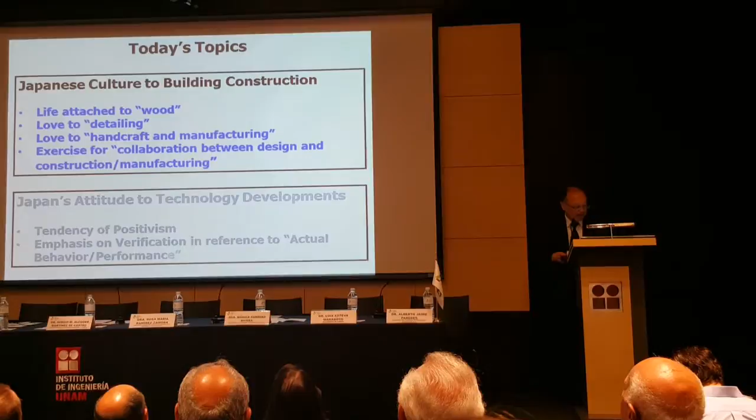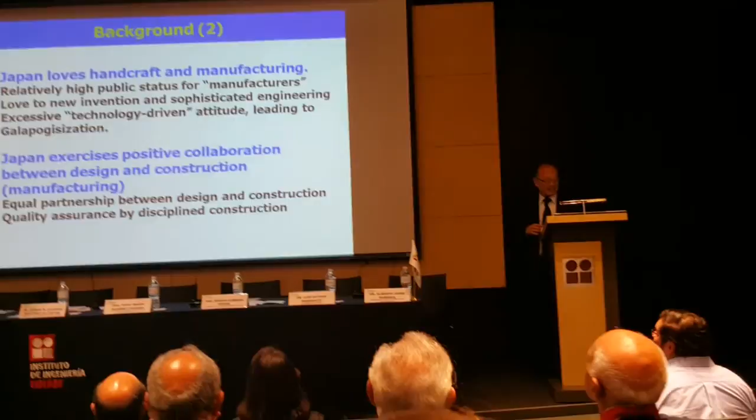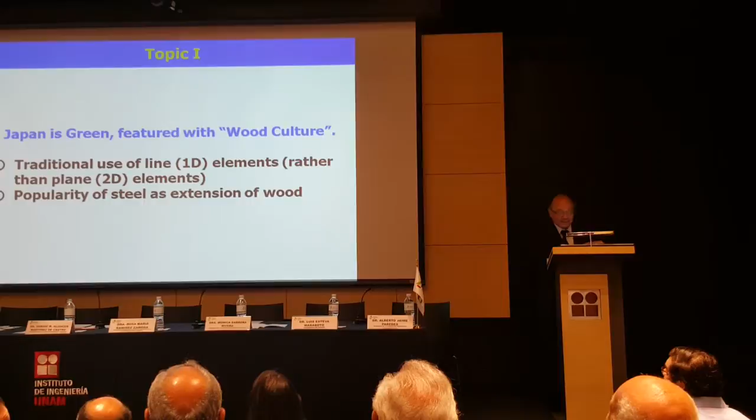Now, two topics I have brought today. One is Japanese culture as it relates to building construction. The other is Japanese attitude toward technology development. I'll start with the first topic. Japan is green, featured with wood culture, different from yours. Japan loves detail, which really characterizes Japanese architecture. Third, Japan loves handicraft and manufacturing. Fourth, Japan exercises positive collaboration between design, construction, and manufacturing. Those are the four subtopics, and for the rest of the time I'll supplement each one.

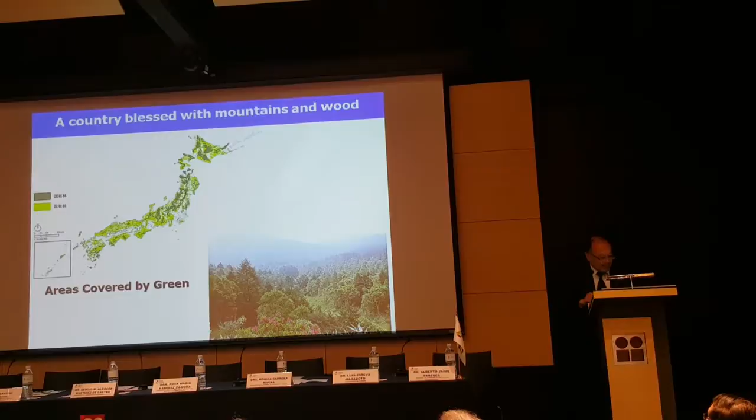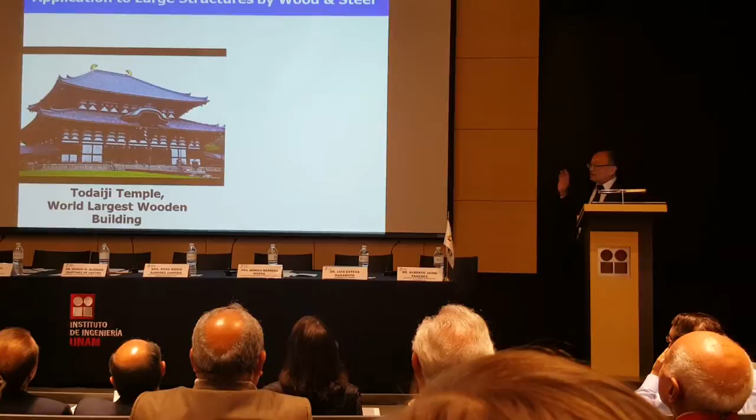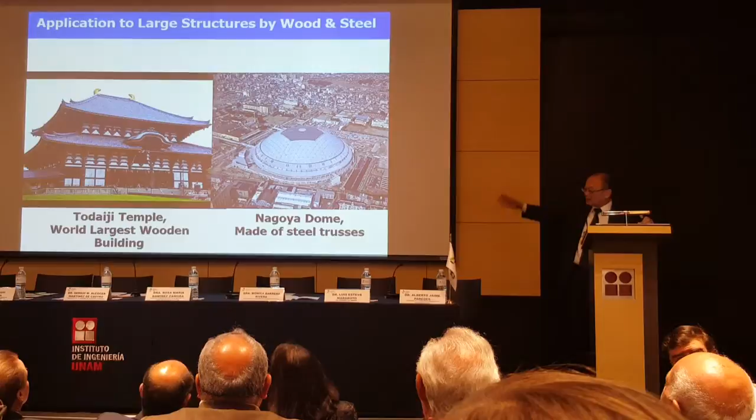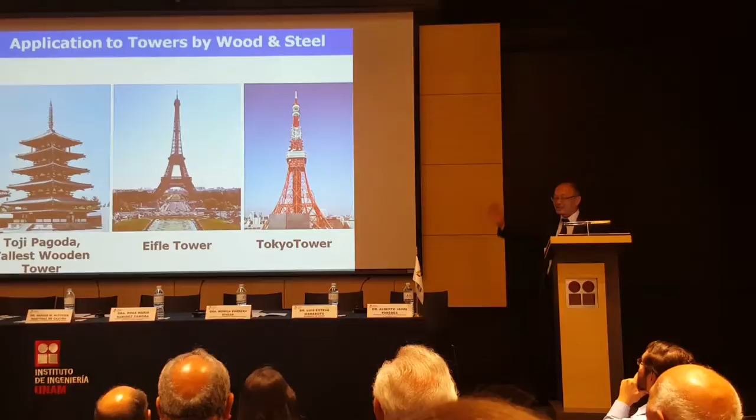The 5-story pagoda is the tallest wood tower, the world's tallest wood tower. And then the Eiffel Tower in the middle, Tokyo Tower on the right—again, from a distance, nearly the same. So Japan is destined to use and love steel by culture.

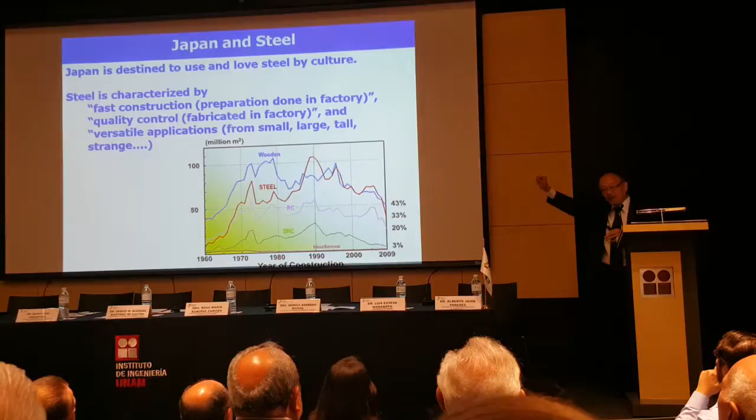To my understanding, there are two basic materials for building construction: one is wood, the other is stone. My understanding is that Mexico has a stone culture. Stone culture moved to reinforced concrete, while wood culture moved to steel. Two different worlds—I come from the other side of the world.

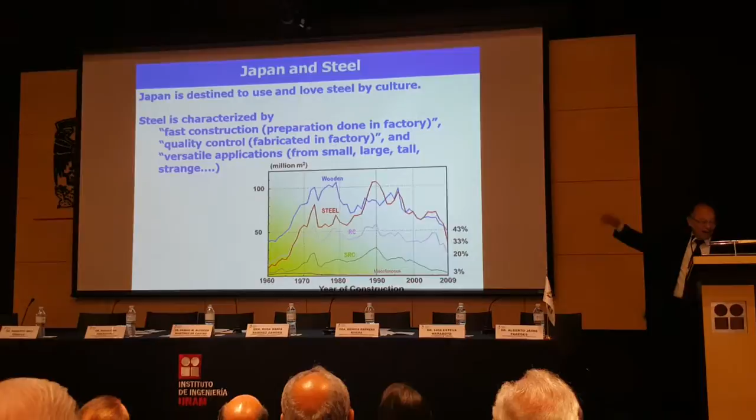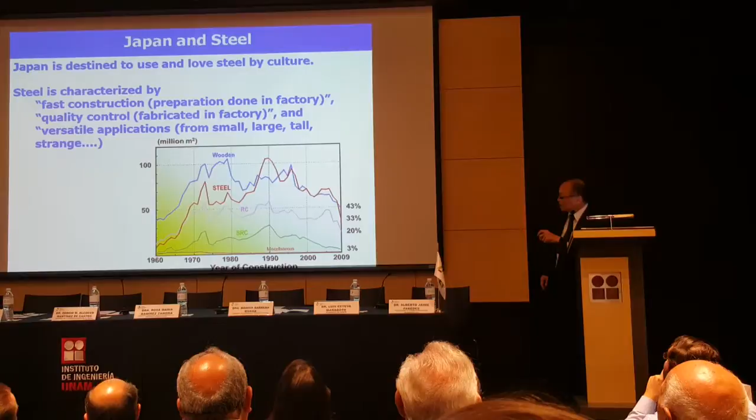Steel is characterized by fast construction, easy quality control, and versatile applications for small, large, and tall buildings. This picture shows the year of construction versus the percentage of each type of material used for building construction: steel, wood, reinforced concrete, and composite. So steel and wood side by side—we are a wood culture. Now, the second topic.

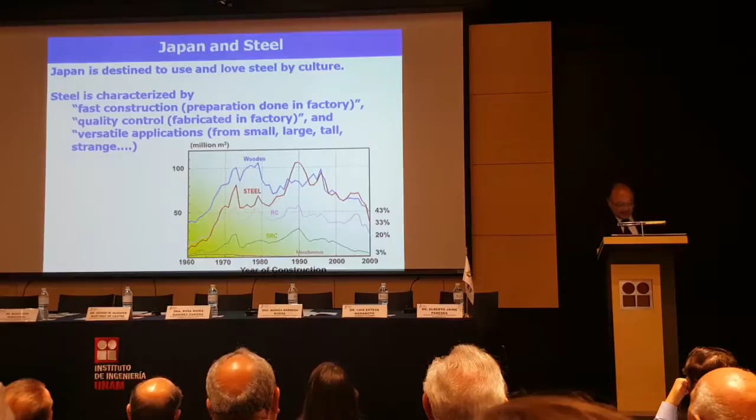Japan loves detailing, which characterizes Japanese architecture. What is that? Complicated roof details, exquisitely crafted eaves, complex connections using interlocking joints, and things like this. We inherited many of these masterpieces built over the past 15 centuries. How it goes, no names, no explanation needed.

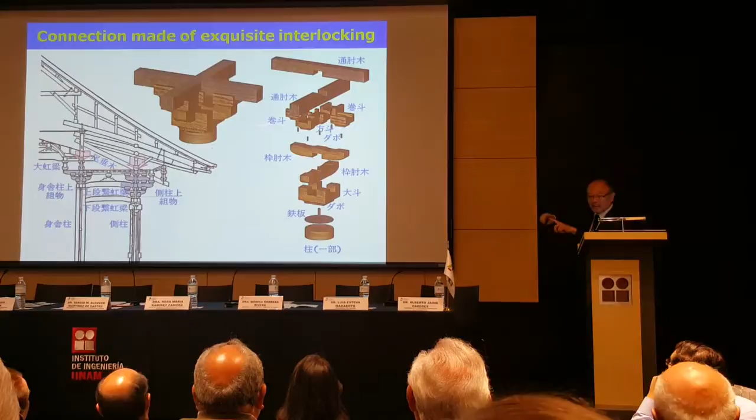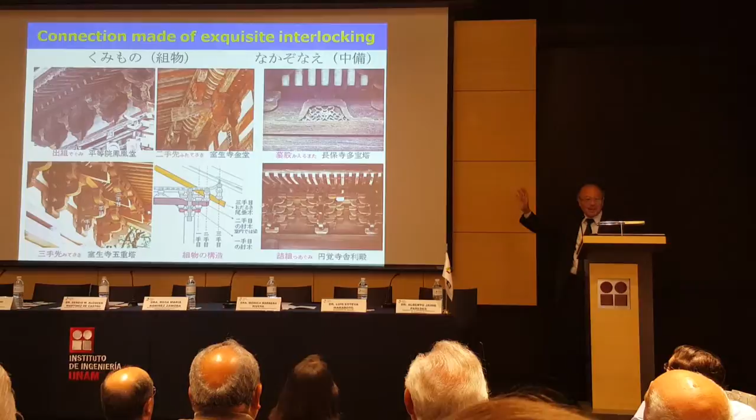Look at that—a connection made of exquisite interlocking joints. There are many pieces, with decorations. This really characterizes Japanese wood structures, and it also carries over into contemporary design and construction work.

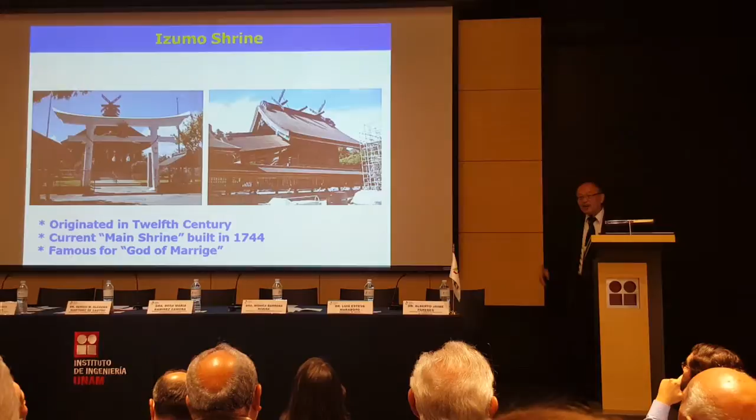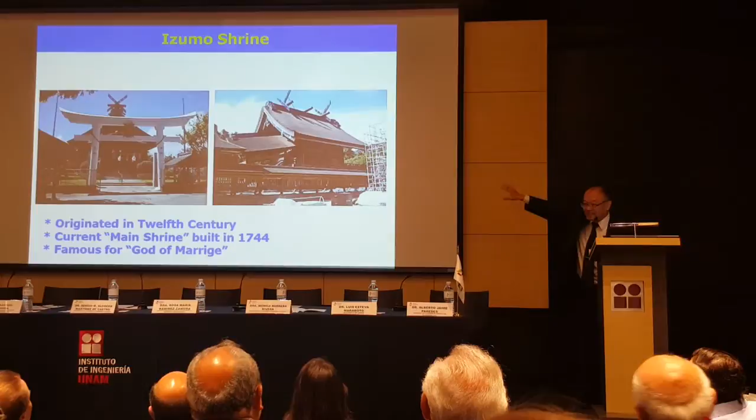This is the City Hall of Izumo City in Shimane Prefecture. There is the Izumo Shrine, originating in the 12th century, with the current main shrine built in 1744. This shrine is famous as the god of marriage—so young people, if you want a good partner, go there and you'll have a good chance. It's a famous shrine, please remember this. See the shape.

The original structure is now Izumo City Hall, somewhat similar. This facade is now like this, but this is a shear wall. And these are vertical lines like long timber columns, but this is CFT. So this way, again, we like to make the resemblance between the past and the present.

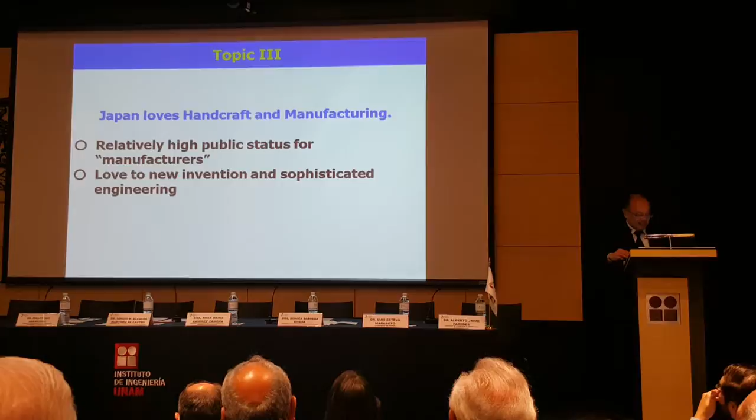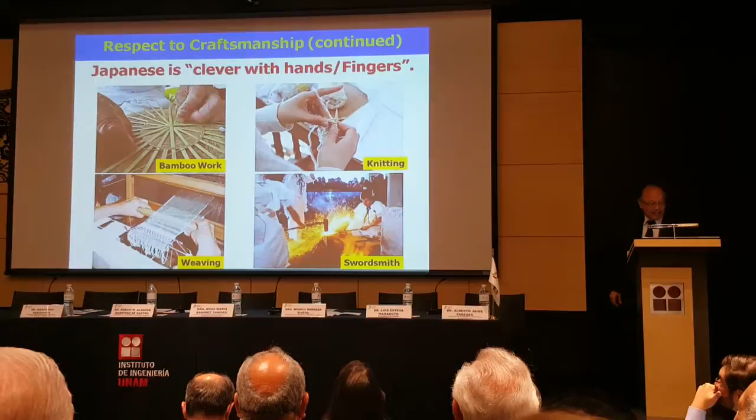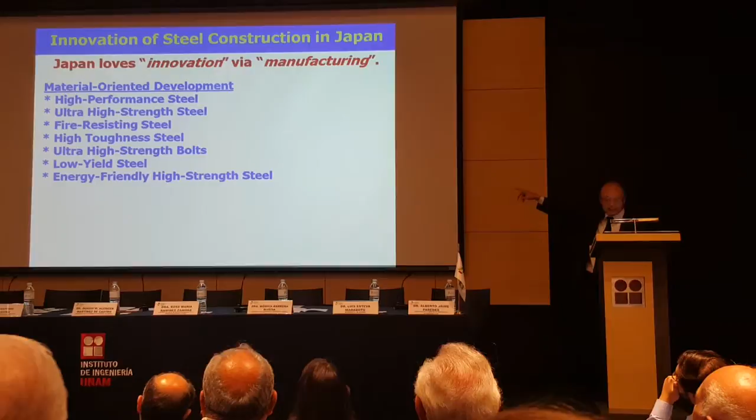Because of this, Japan loves innovation via manufacturing. This again is a characteristic that features Japan. Within the scope of steel, there are many developments done in Japan: high performance steel, ultra high strength steel, fire resistant steel, high toughness steel - many, right?

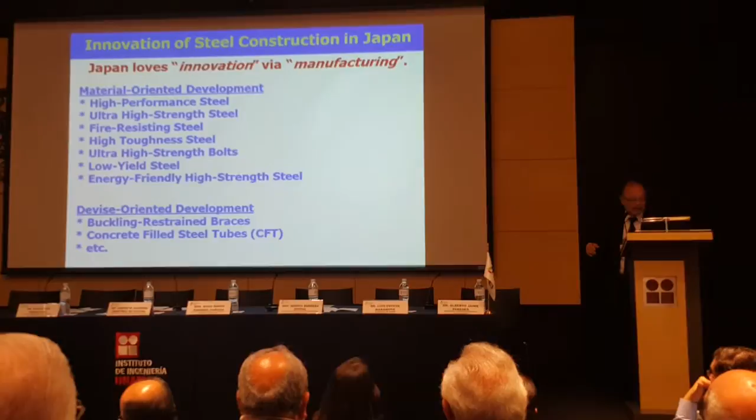Also, next to the material, we have elements and devices - buckling restrained braces, some of which you may have heard of, or concrete filled steel tubes, etc. They are not necessarily originated in Japan, but very much developed in Japan.

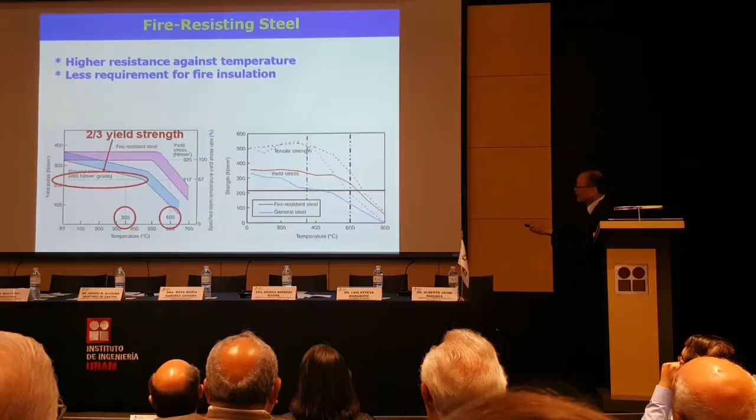High performance steel, fire resisting steel - this means there's something special such that the strength will not go down with high temperature, so no fireproofing is needed. Or, high strength is on one side, low strength is on the other. Low strength steel, intentionally low, is then used as an energy dissipator.

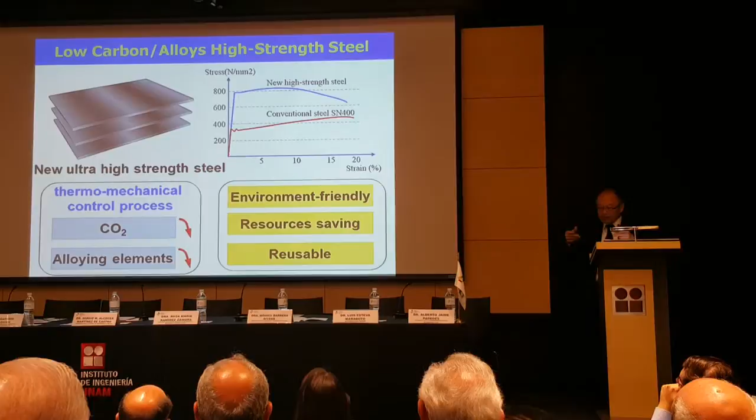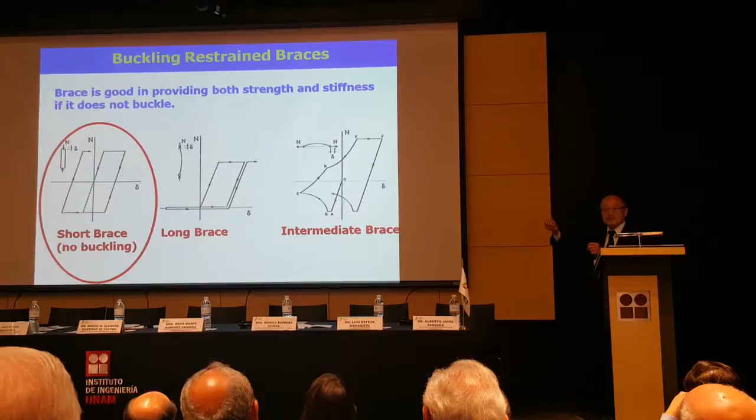These days, in the name of CO2 reduction and being environmentally friendly, we develop different types of steel as well. And then buckling restrained braces - braces are normally good in tension but bad in compression because of buckling. But then we wrap the brace like this to avoid any buckling. This has been quite popular lately in many countries.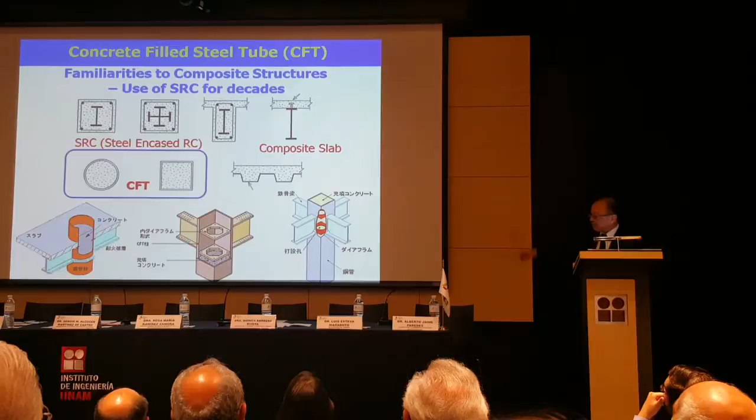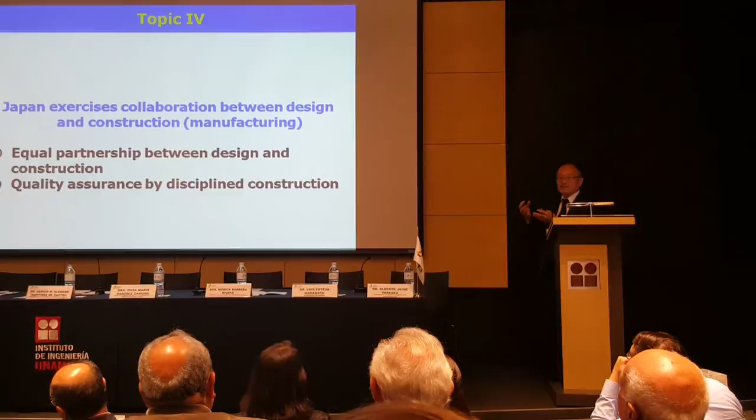Or CFT - it's simple. Here is a box, and we put concrete in it, that's it. Nothing else, no reinforcement. But still, this exhibits good ductile behavior. We like manufacturing, and manufacture-oriented research and development are some of the keys that characterize Japan.

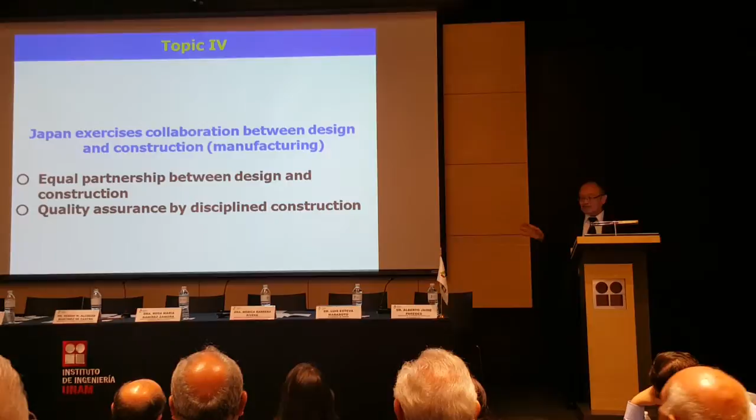Now, the last topic about my first subject: Japan exercises collaboration between design and construction. What is this? One is equal partnership between design and construction. The other is quality assurance through disciplined construction.

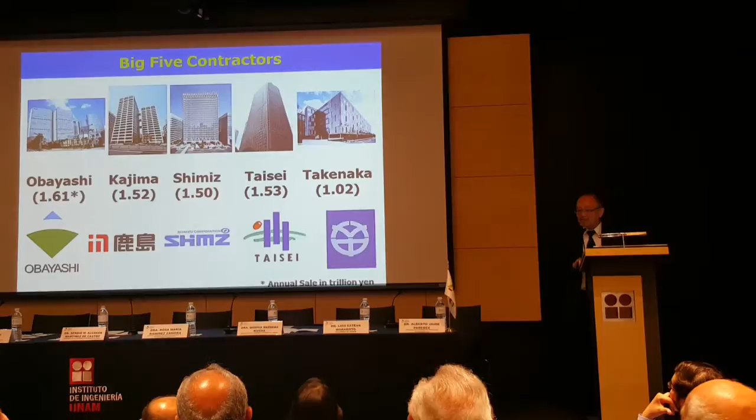In Japan, we have the so-called Big Five general contractors: Obayashi, Kajima, Shimizu, Taisei, Takenaka - those big firms. What characterizes them is they have active in-house research and development institutions. All five of them have in-house research institutions themselves.

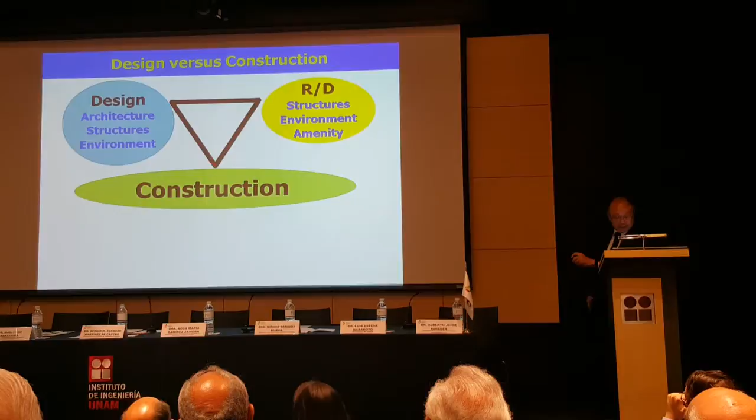What they do is this: they do design, and they do research and development. Not only that, they also do construction - that's the biggest portion. That's the Japanese way: positive interaction among those three sectors for the ultimate construction of buildings.

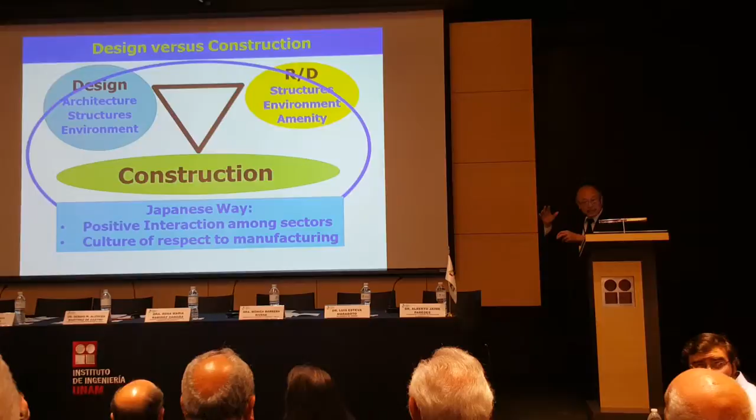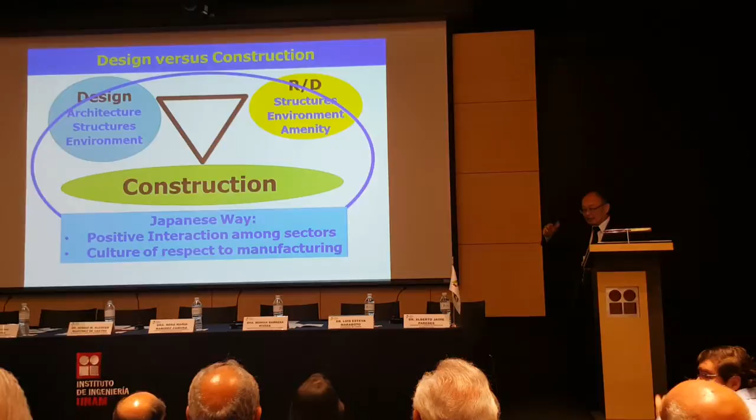Traditionally, of course everything is relative, but please look at the culture of respect for manufacturing. I showed earlier slides about craftsmanship, fabrication and manufacturing. So we have a spirit and culture of this, making those three components come together for ultimate quality control.

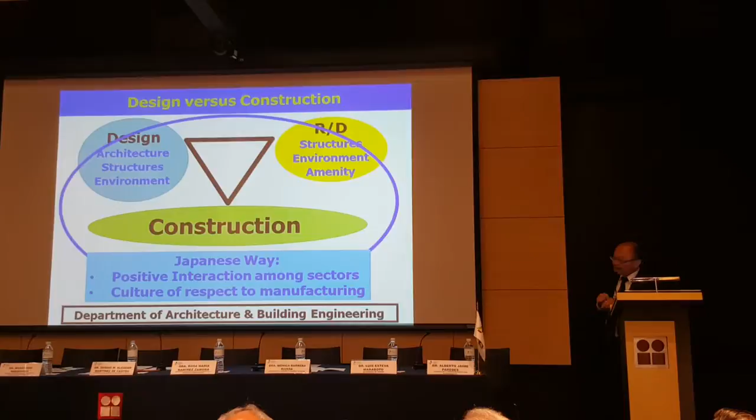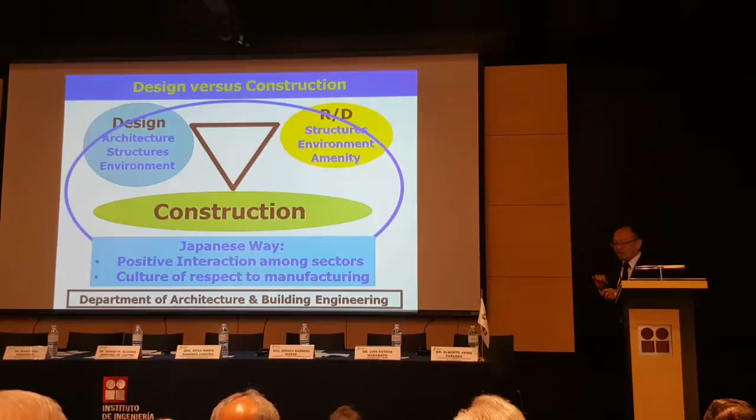This may partially be because of the special education system in Japan. I am a structural engineer myself, but I did not graduate from the Department of Civil Engineering - I graduated from the Department of Architecture. Only in Japan these days does the Department of Architecture and Building Engineering teach environmental aspects, structural aspects, design, architecture - everything.

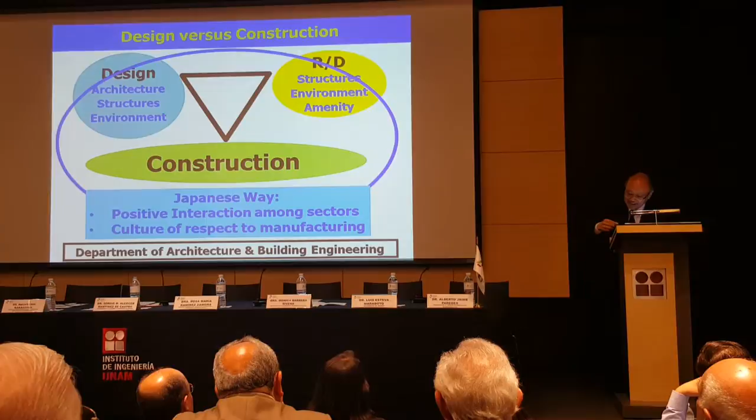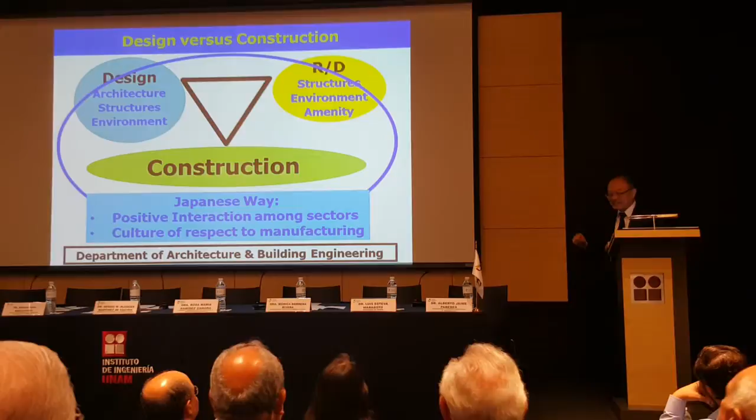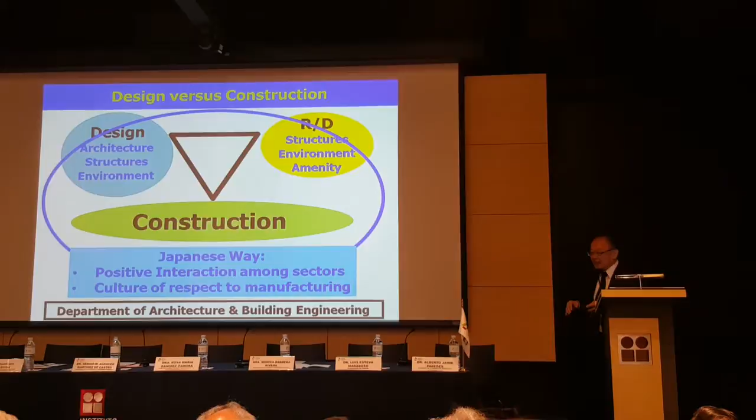At age 18, when I entered university in this department, I wanted to be an architect. But after 3 months, I was smart enough to understand I'm not talented. But I didn't have to leave the department - I could stay, and I took a lot of design-oriented courses myself, particularly for the first 3-4 years. Many of my friends now are architects, so something is probably embedded in me thanks to this department. This may be a reason why the Japanese way works.

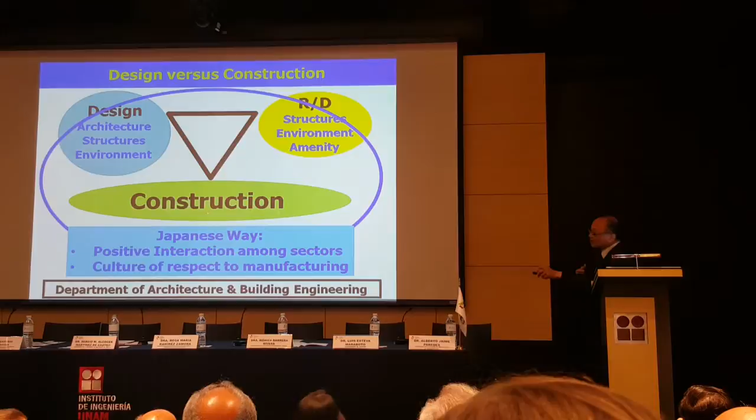Design is important, R&D is important, but naturally the most important is construction - how do you discipline construction? Example one: morning assembly, everyone comes, gymnastic exercise together, instruction sessions for anything new, or schedule checking all together.

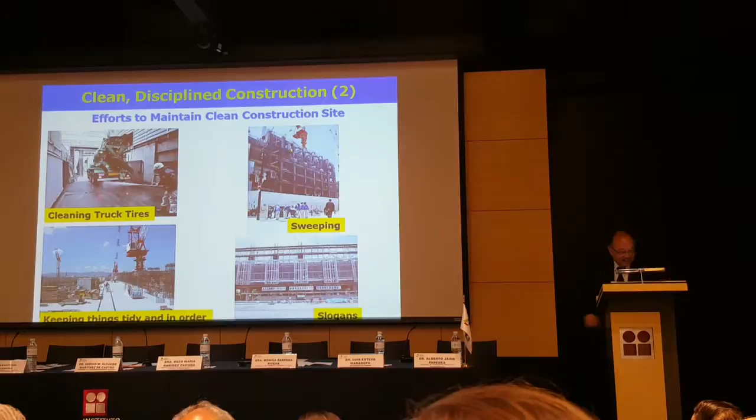When the truck comes in and comes out, they have to clean up all the tires, keeping things tidy and in order, sweeping constantly, and being safe.

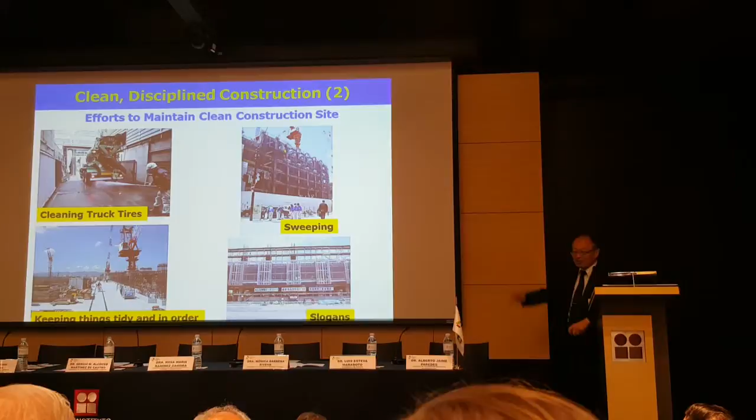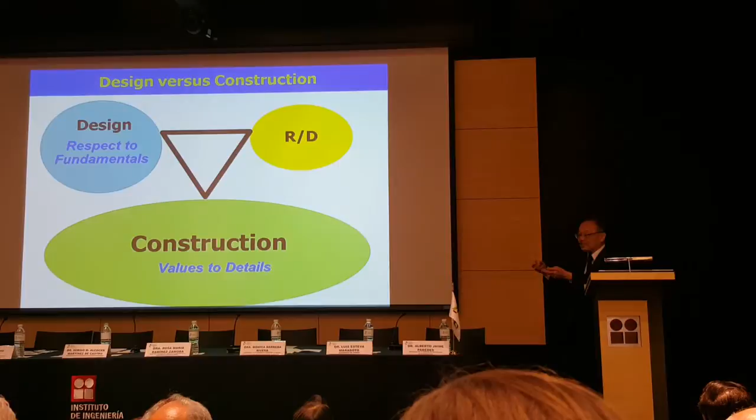So, design. Essentially, design is meant to have respect to, say, fundamentals. But on the other side, construction, they put value to details, because this is a key for the ultimate quality control. I think this is the end of my first subject.

So this, of course, it's a big propaganda, but nonetheless, I really wanted to show what spirit we want to maintain. Now, on December 8, 1987, I had an honor to introduce myself to Professor Rosenblueth. After nearly 30 years, I'm here. I'm overwhelmed. This is me.

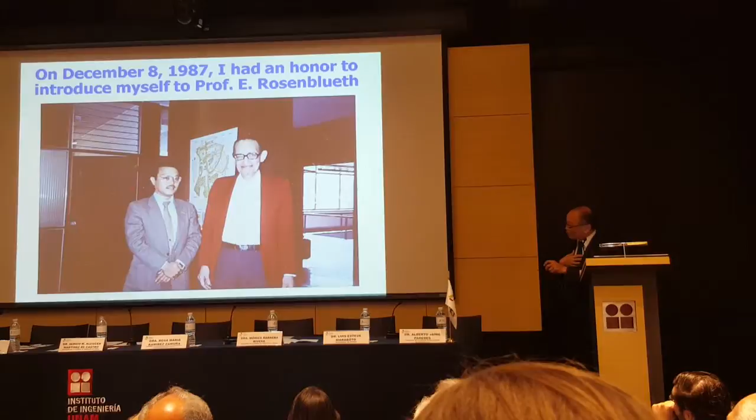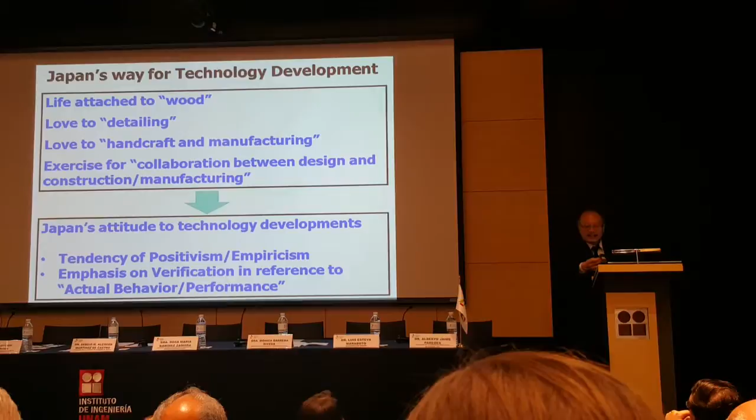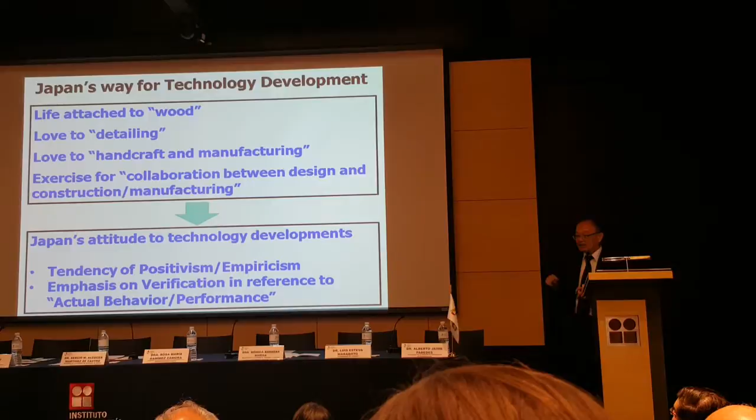Let's go to the second subject. A little more technical, but this means, say, less interesting. But nonetheless, Japan's attitude to technology development. What is this? We have a tendency of positivism or empiricism, whatever. So we tend to put emphasis on verification in reference to actual behavior or performance. So, the translation is, right? Fundamentals, the theories, and that's good, but we don't trust 100%. We really want to see the reality. And then for the first time, we understand, let's go.

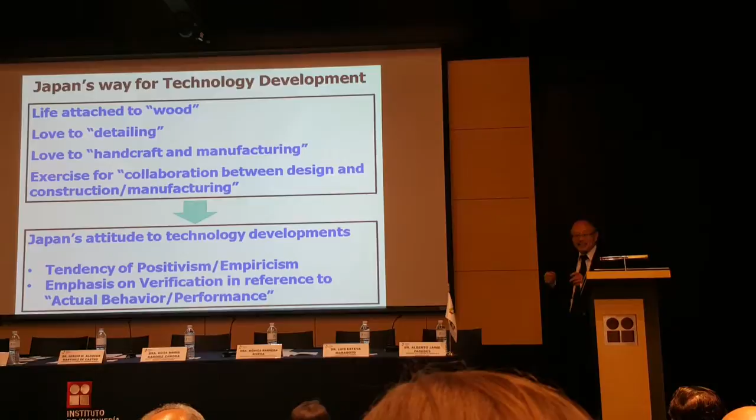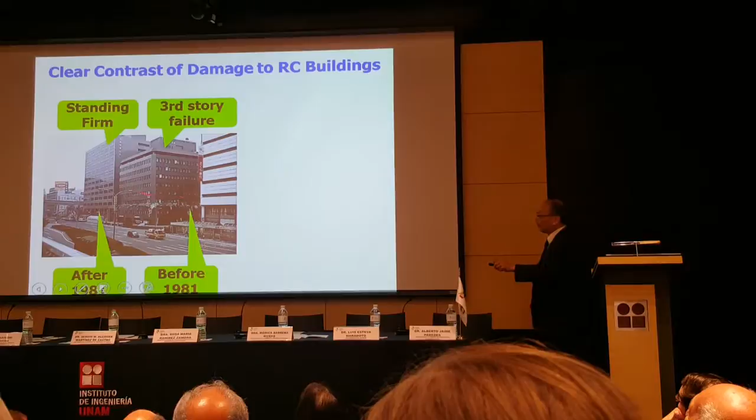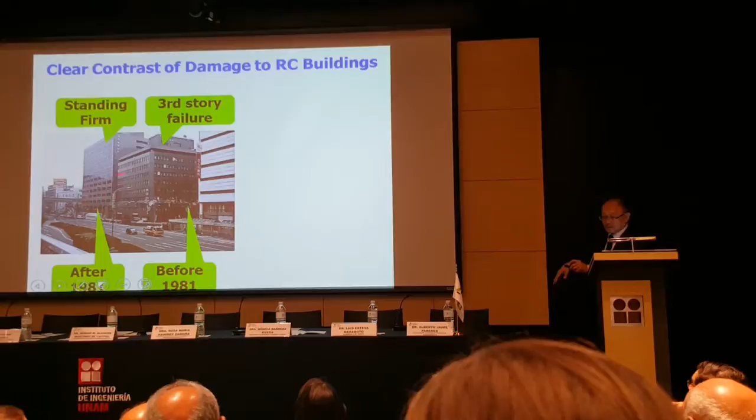Now, 1995, we had the Kobe earthquake. And then some of the pictures you may have seen, collapses after collapses. And then here we found a clear contrast in damage between the two buildings, for example. So those two, downtown. The same site, the shaking is the same. But one, the third story is gone, but the other stood firm. What is the difference between those two? Year of construction. One is pretty old, the other was new. And then new one really good, old one not good.

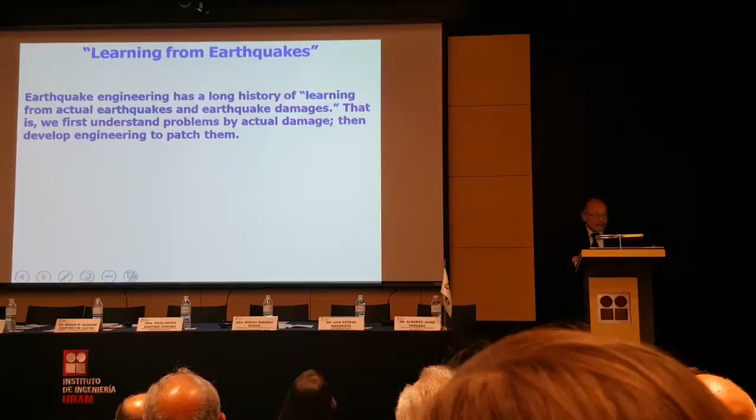So then what we have learned out of 20 years of Kobe. First, earthquake engineering has a long history of learning from actual earthquakes and earthquake damages. That is, we first understand the problems by seeing the damage. Then we develop engineering to patch them.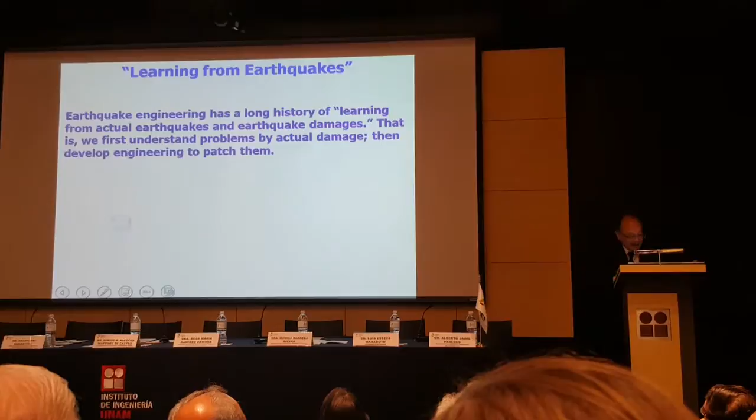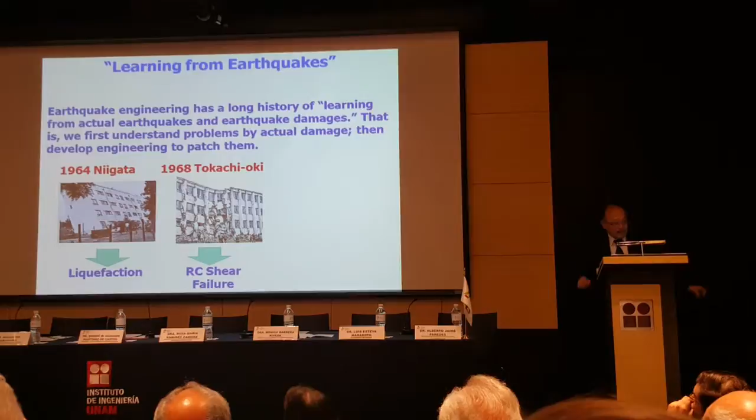Now, as far as Japan is concerned, 1964, we had the Niigata earthquake, and we suffered from serious liquefaction, so buildings completely toppled. And then anti-liquefaction research and also practice began after 1964. 1968, we had the Tokachi-oki earthquake, then shear failures after shear failures, columns like that. Then reinforced concrete shear failure, how to avoid it, became the important issue, eventually reflected into our seismic codes.

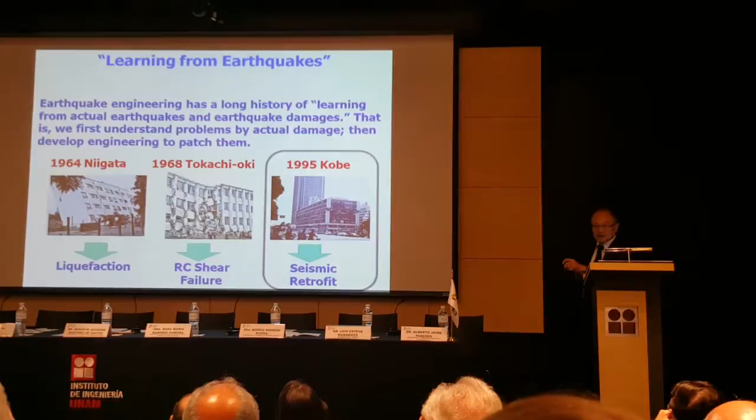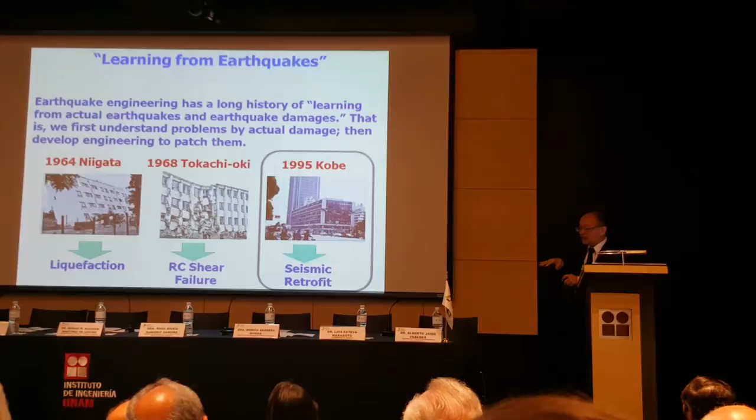Now, 1995. What was the biggest lesson? Seismic retrofit. They look the same, but some very strong, some very weak. A lot to do with the age, but also with the way of construction. Then those not sufficient in performance with respect to the current standard, they have to move up. This is called seismic retrofit. This, of course, has been said for many years, but in 1995, we really confirmed the importance of that.

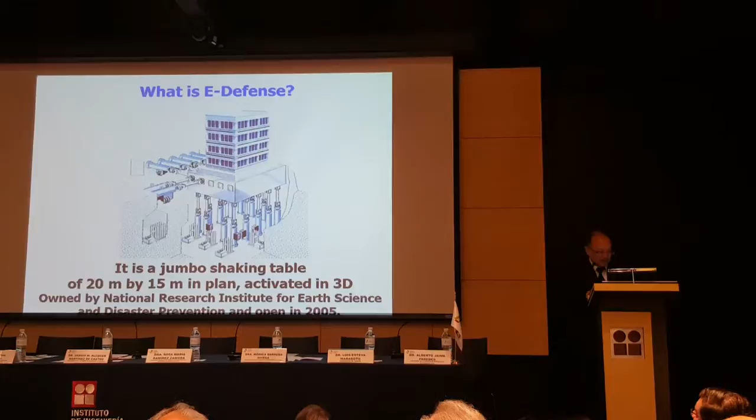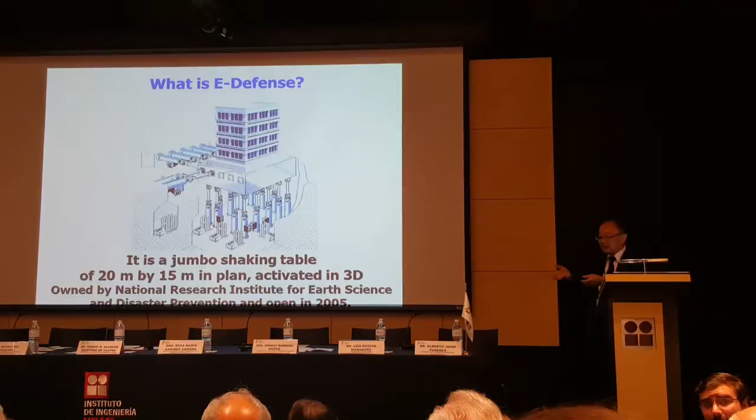Then, after 1995, the government of Japan put a lot of money into this special facility called E-Defense. What is this? It is a jumbo shaking table of 20 meter by 15 meter in plan, activated in 3D. This is basically a big table, put the real structure on it, shake it to see if it behaves. Why did we invest in such a huge facility?

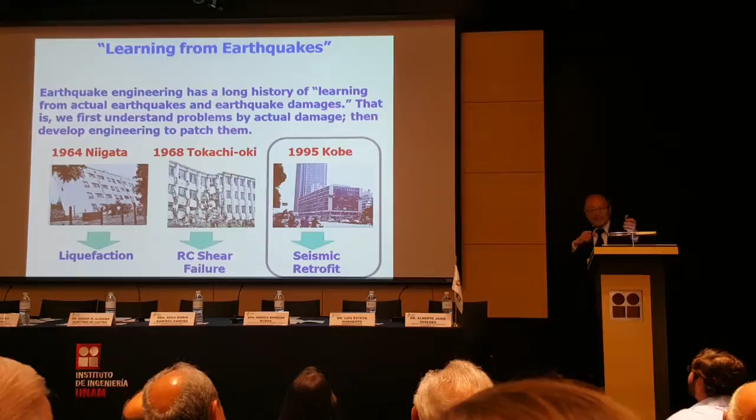Because of this big problem, how to solve it. We have many solutions, but please remember our tendency: theories are not sufficient. We want to check before the actual application if it works or not. How to verify that? We need this. That was the reason behind the whole concept.

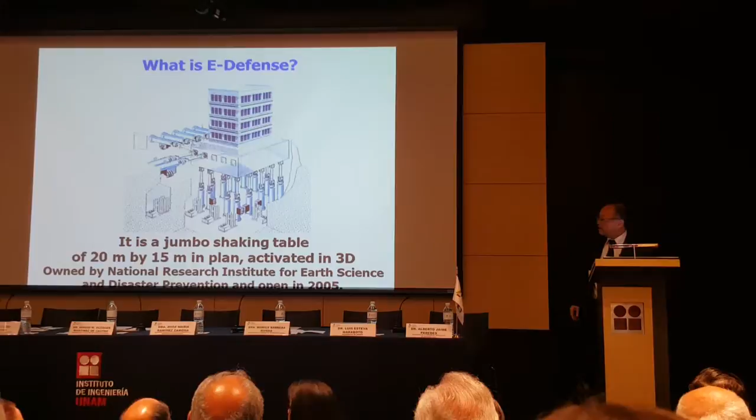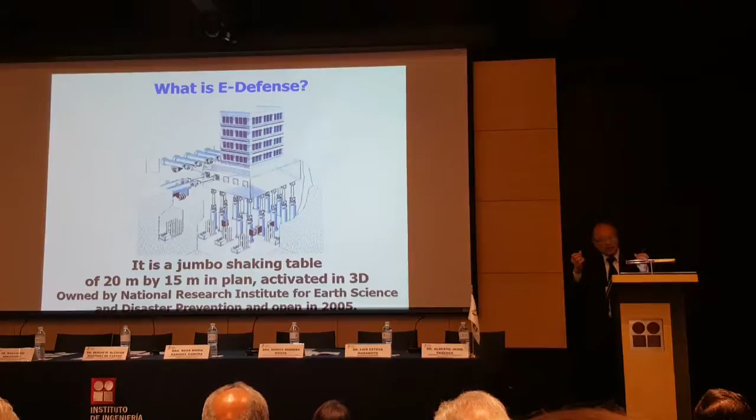So then, as many of you know, small scales are nice, but sometimes many of the important behaviors disappear in the course of reduction of the size and scale. So particularly before the application, whether our technologies are really fine or not, we want to check this as large as possible, hopefully at full scale. That is again the concept behind it.

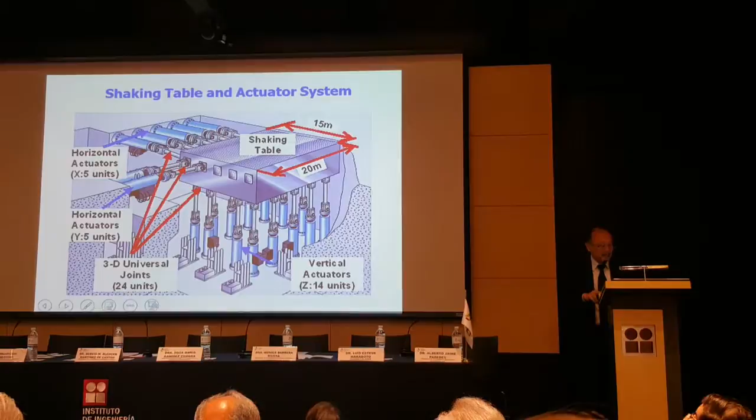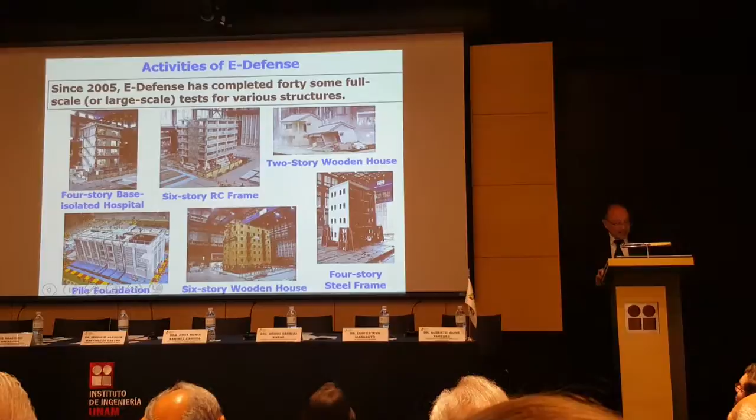Now this is the scheme of the shaking table, 20 by 15 meter and 7 meter high. The total mass is several hundred metric tons. It's a big chunk of steel, and then many actuators in both directions to give horizontal motions and also vertical motions as well. And then since 2005, by the way, the E-Defense